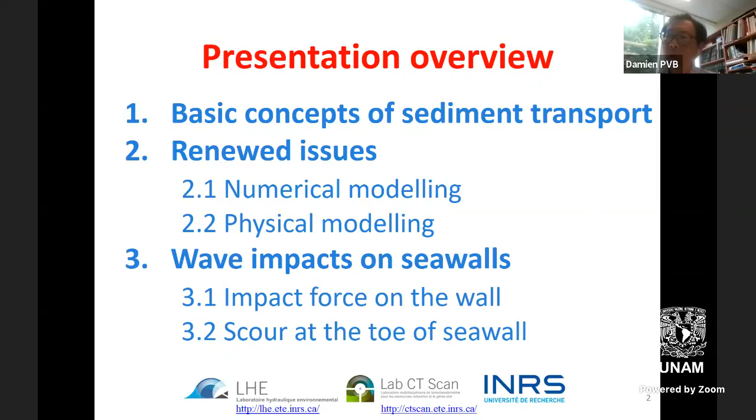So my presentation will propose three parts. One is some background on sediment transport: why is this important, what are the difficulties? Second, how numerical models can tackle difficulties, but what are the still remaining open questions? Also, the difficulty of making measurements and how inaccurate measurements sometimes are. And finally, I will illustrate with an ongoing study in my lab about wave impacts on seawalls in terms of impact forces, but also in terms of erosion at the toe of the structures.

So this first part is to give you some background: how important, how difficult the study of sediment transport is still nowadays, because it's a very old discipline. A long time ago, researchers were interested in sediment transport because it changed river morphology, it creates river meandering. It is also a problem for a lot of human activities like fishing, harbors, coastal engineering, coastal erosion, coastal flooding, and so on.

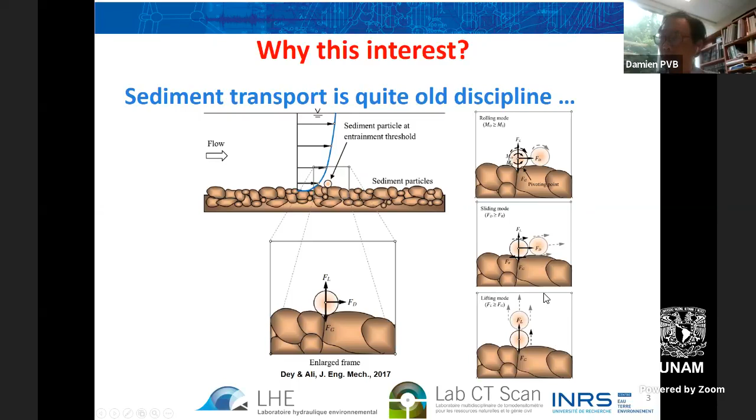Depending on the magnitude of the forces, we can have different motions of grains. For low velocity, but strong enough to move sediment, we can have rolling motion, so the grain rotates. For intermediate, we can have sliding, so the grain does not rotate and mostly slides. And when the fluid flow is very strong with high turbulence, the flow can pick up sediment directly vertically. So it is not clear that we can describe all of these modes of transport with unique parameters, but engineers consider unique parameters.

And nowadays, sometimes, because coastal protections are, in a sense, quite old, they suffer from coastal erosion themselves. So here, the danger can be high pollution, in particular if we break the oil pipeline. It can also be dramatic for communication if we have optical fiber collapse. And we can also have economic impact and societal impact when a coastline is eroded.

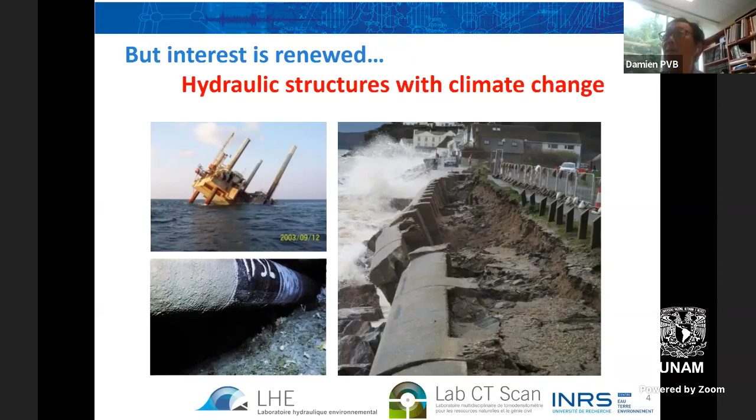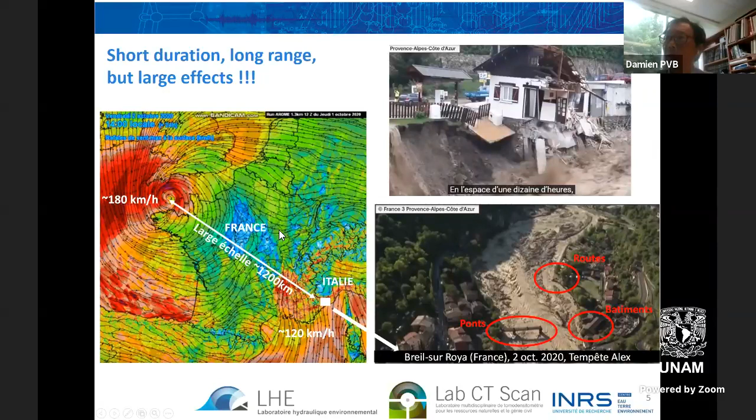Here you can see a bridge collapse. You can see roads damaged, and also buildings. And this damage only took place in a few hours. Of course, this phenomenon is related, in a sense, to climate change, and is prone to be more present in the coming years.

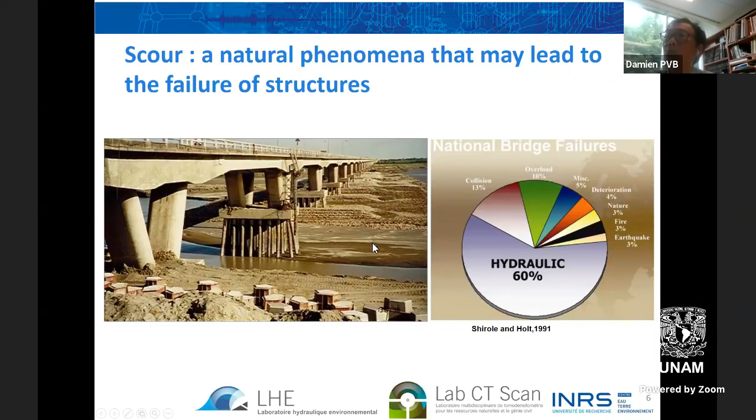So this typical picture is of interest for different types of constructions, monopile, multipile, also pipelines, as I explained before, but also coastal protection like seawalls or coastal dikes. In general, in natural environments, we can have many types of sediments, sand, clay, but also gravels. We can also have vegetation covering that sediment bed. And there is a huge variability in sediment in terms of density, organic content, minerals, and that material can have different states, saturated or not fully saturated.

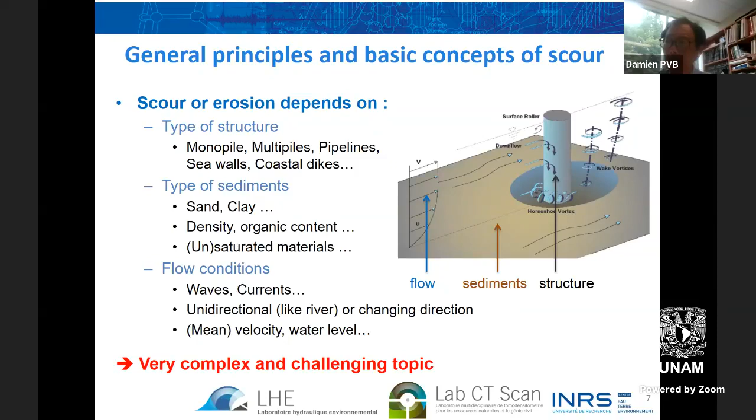Flow conditions are also very diverse in nature. That can be waves, current, and interaction between wave and current is very difficult. So the system has many parameters, and the physics is still very complex and challenging to describe in both mathematical and physical approaches.

I can also describe other similitudes for sediments or for water and air bubbles. Of course, there is field survey, which is very expensive, but which is important for applications. This part will not be detailed in this talk. Here in our lab in Canada, we have a very important facility to measure physical models at fine resolution.

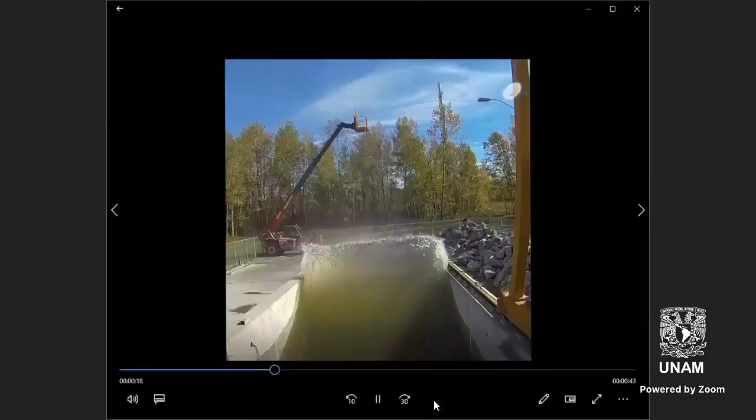Okay. Here. So, for instance, this is our large wave flume, which can generate realistic waves. And here is a demonstration of wave impacts on a vertical wall. Here the wave is around 2 meters high. The period is around 3-4 seconds. And in this study, we measure pressure at different points, and also the overtopping flow discharge to assess coastal flooding with high waves.

Okay, here I need to share this again. Can you? Yes. Can you, okay, sorry.

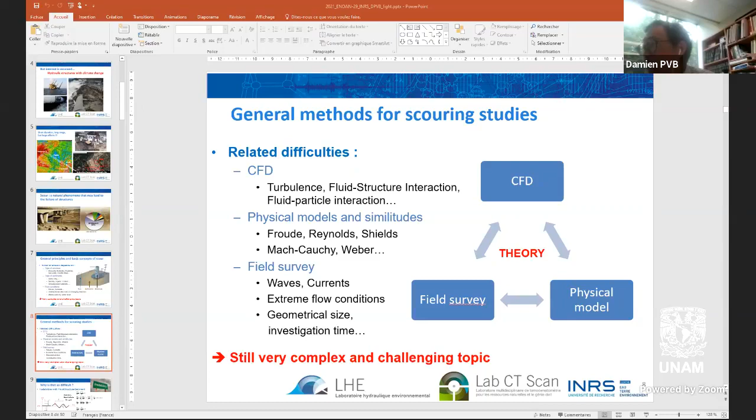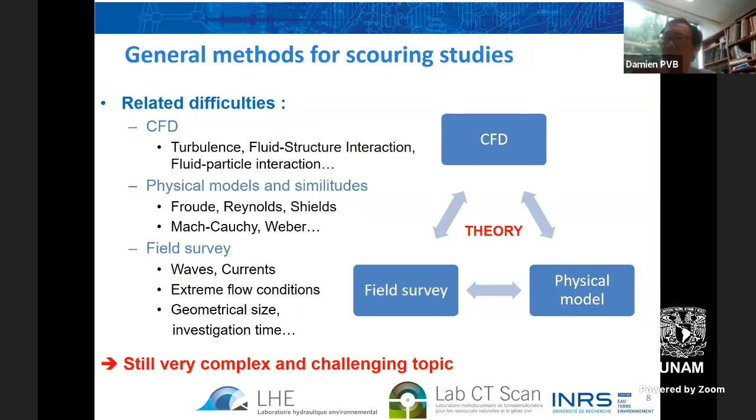Thank you. So just some slides, just 2 or 3 slides explaining in theory why the interface is a big question. With a fluid sediment, we can roughly assume that we have a fluid over a sediment bed, which can be considered as a high viscosity fluid, for instance. So the mechanism of erosion can be seen as a problem with a 2-layer fluid having an interface, and adding some kind of perturbation will create undulations.

So in fluid mechanics, we have very fundamental instabilities, which are called Rayleigh-Taylor and Kelvin-Helmholtz instability. So I will only describe this in 2 slides. This slide is to give you some notation when we have a high-speed fluid with density ρ1 that flows over another fluid having different density. So here is the mass conservation for potential flow. Here is the motion equation or Bernoulli equation, and this is the interface equation from the fluid 1 side. We have the similar equations for the fluid 2 side with mass conservation, motion equations, and interface.

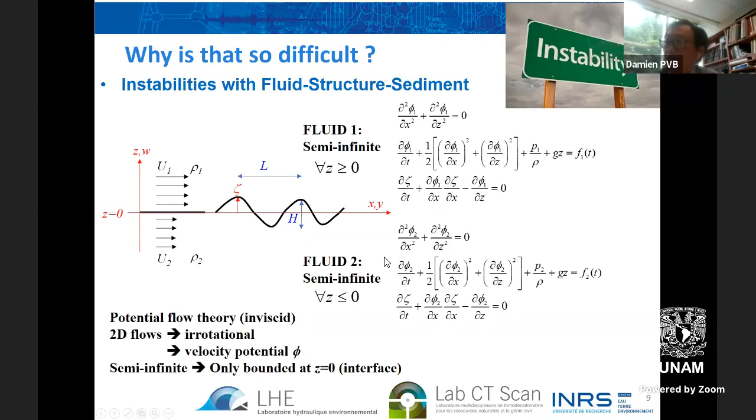Here to demonstrate physical instability, we consider a very simple theoretical case with potential flow, irrotational flow, and semi-infinite media. So linear stability analysis, a useful method for physicists but also for mathematicians, considers the stability around a base flow and analyzes a perturbation which has a waveform. So this is a waveform propagating along x with the phase velocity omega divided by k.

And here we make some analysis on the perturbation by linearizing the previous systems and obtaining this matrix relating the linearized equations in terms of perturbations, and we derive dispersion relations as a condition of nullity of the determinant of that matrix. And this is a classical dispersion relation for the previous system, having one fluid 1 over another fluid 2.

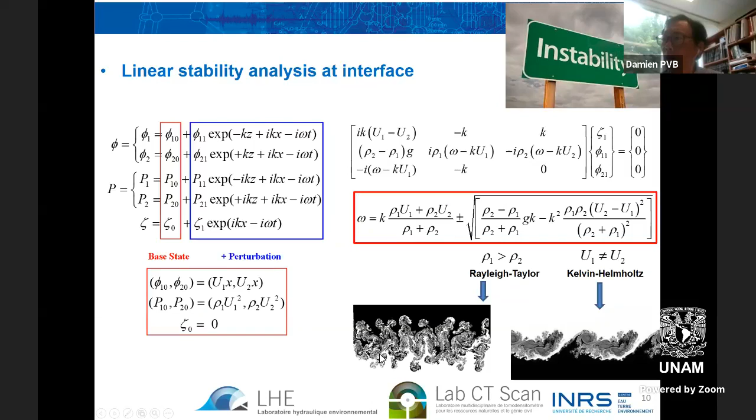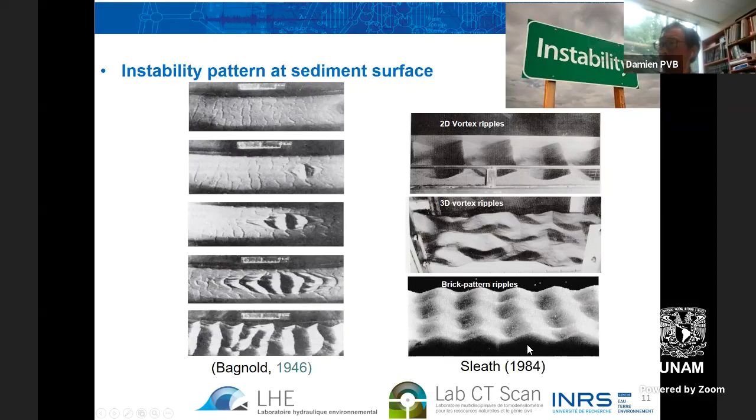Here are also other instabilities that we can observe with waves, starting from a flat bed. We can have undulations like Kelvin-Helmholtz, but with sediment. And here it is only 2D. And we can also generate 3D instability patterns, like 3D vortex ripples, and also this kind of more regular pattern shaped like a brick.

So this is to explain the context, the background of the fluid, sediment, and structures. So now, with this part, I would like to present the numerical approaches that are available to deal with that kind of system, and also physical approaches to model this kind of system in the lab. So here is the general principle of all numerical methods dealing with mobile beds undergoing erosion and deposition under flow, which can be current or waves.

So we usually start from the geometry of the system to compute the flow. From the flow, we derive the friction or the fluid-sediment interactions to compute the sediment transport. From sediment transport, we localize zones of deposition and zones of erosion that change the geometry, and we loop to the next step to change the hydrodynamics, which will change the sediment transport and also change the geometry and so on. This loop is very similar to instability.

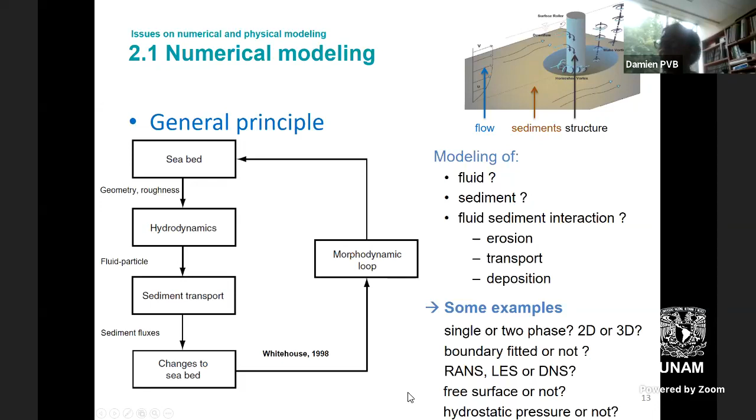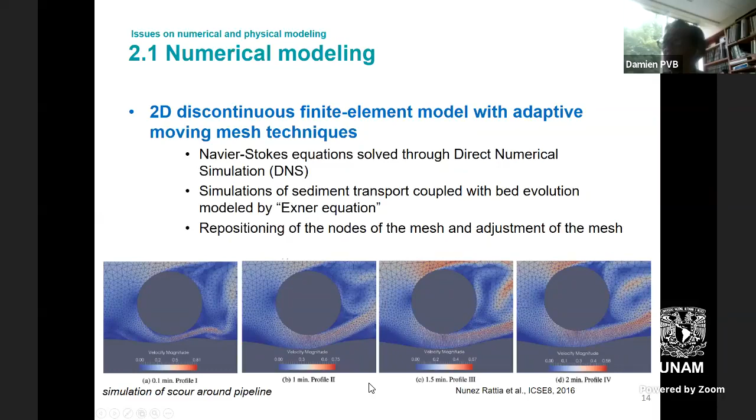So in this approach, we have not so bad results for a numerical model. I will explain to you later why I consider this result not so bad. Of course, for mathematical guys, I think people can see a very large difference, but I will explain that there is much uncertainty in physical parameters that makes that kind of result acceptable.

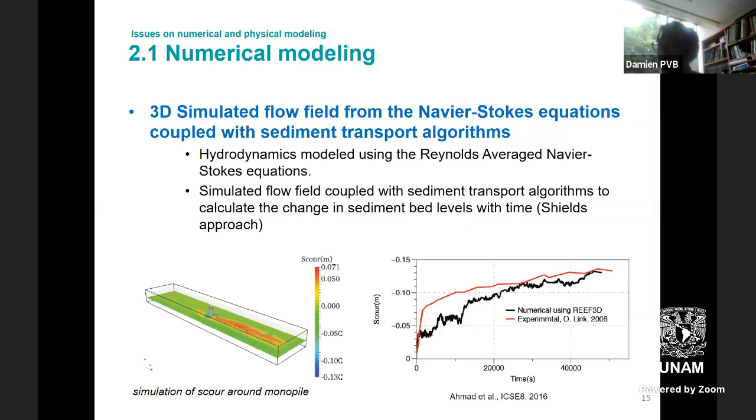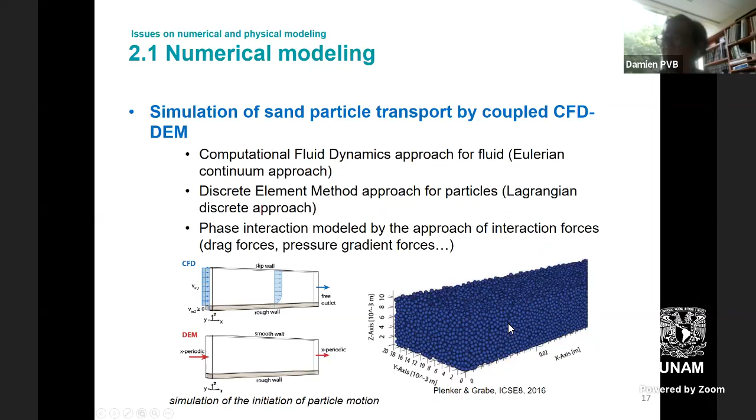So in my lab, we are using a two-fluid model, which computes both parts of the liquid. We have one layer of pure water or clear water, and one layer with sediment fluid like this. And we compute, in this case, jet impingement on the interface. And in the past we did shearing of fluid 1 over fluid 2 and obtained a nice Kelvin-Helmholtz shape.

We also applied this kind of model to scouring. Here we have a cylindrical pile subjected to river flow. Here is a description of streamlines with high vorticity in the wake region, and also some horseshoe vortex just upstream of the cylinder.

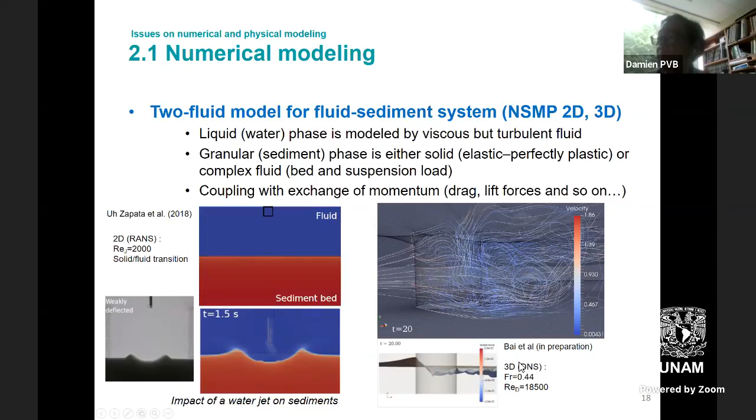So this is now a moment to talk about physical models. After describing the mathematical models that can be used to deal with fluid, structure and sediment problems, here are existing facilities. This example is an experimental facility in the UK, showing a study on coastal structures like dikes protecting harbours.

The same lab, showing a half cylinder subjected to waves to simulate an offshore wind farm. Here you can see the magnitude of scour erosion in the vicinity of the pile.

This example is my previous lab in France, showing design and conception of dikes, and design of armor blocks along dikes for sea defense in coastal regions. And here another famous lab in the Netherlands, showing multi-piles subjected to waves.

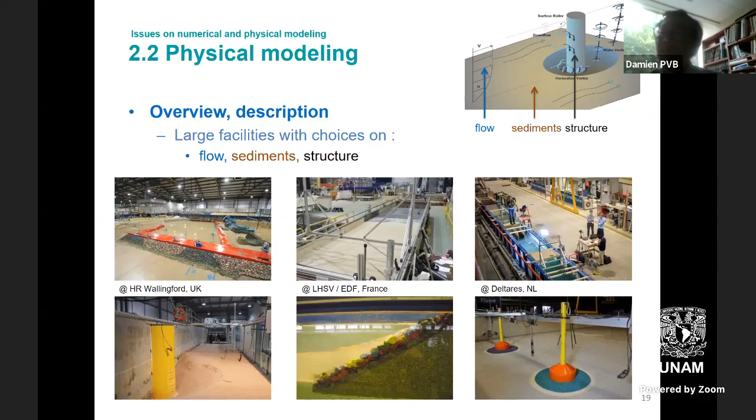So in all of these experiments, we need to fulfill requirements to upscale measurements to natural conditions, and this is done by strictly respecting scaling rules, which are mostly the Froude number. The Froude number is defined like this, as the ratio between velocity and critical velocity. There is a connection to the Mach number for compressible fluids like air.

And another important parameter to characterize the turbulence is the Reynolds number, which is the ratio between the velocity times the length scale, and the viscosity.

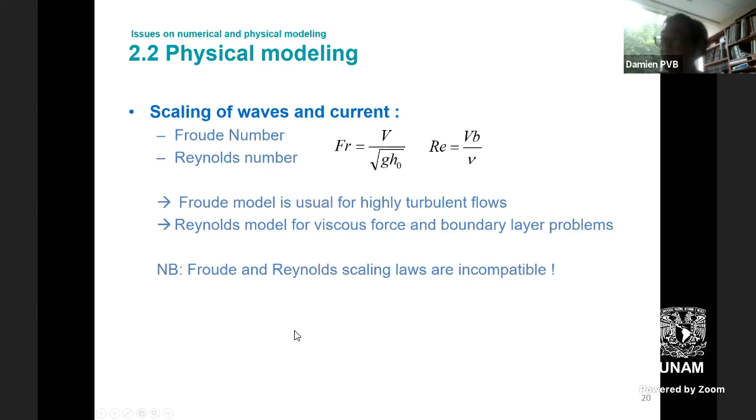One difficulty in coastal or hydraulic engineering is the compatibility between both similitudes. As we know, for water, Froude number and Reynolds number are impossible to fulfill together. So the only condition to respect both scalings is to change the liquid, which is not very easy for a large facility. The other is, of course, having a scale reduction equal to 1, which is also not convenient for laboratory conditions.

When dealing with structures, we also have to consider the interaction between waves and the structures. In particular, you can have diffraction, you can have a different pattern in the wake regime. So in this case, we need to fulfill another non-dimensional number, which is called Keulegan-Carpenter, showing mostly the transition between drag and inertia.

When dealing with waves and breaking waves, the aeration of the wave during breaking also plays an important role. As you may know, a small amount of air bubbles in water makes the water compressible. So a small amount of air bubbles can change the important property of incompressibility of the liquid of interest. Here is an example showing the bubble effect during wave impact. In particular, the momentum transfer of force to the air bubbles reduces wave impact on the wall.

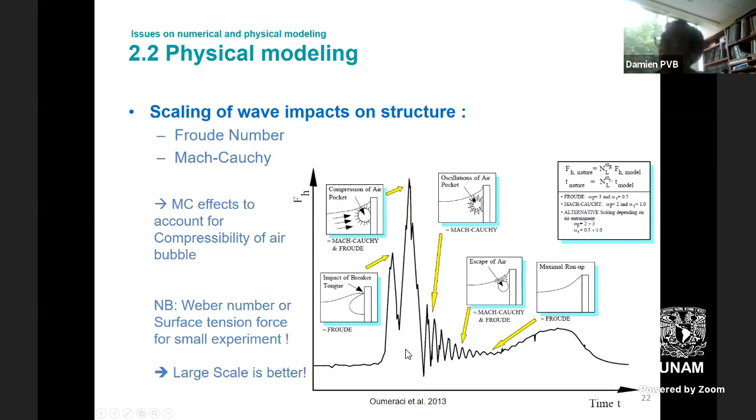Of course, if we deal with sediment, we need to consider scaling of sediment transport. This is done by considering the Shields number similitude, which expresses the entrainment force by water relative to the stabilizing force on sediment, which is mostly gravity. Here is a diagram showing the critical number for erosion. Above, we have erosion. Under, we have no erosion.

But recent studies present different curves depending on the mode of transport: rolling, sliding, or lifting. In particular, we can have slow motion below the classical critical curves during the rolling mode, and this is mostly one reason why the condition for incipient motion is not so accurate. Here, for instance, you can see that we can have 2-3 orders of magnitude between the theoretical critical value and the other criteria if we consider rolling.

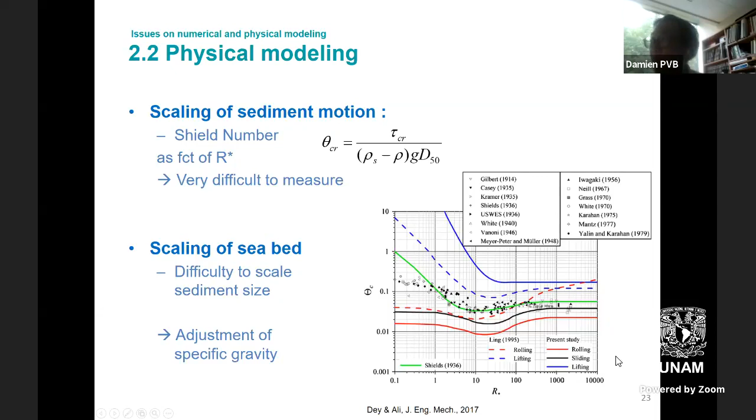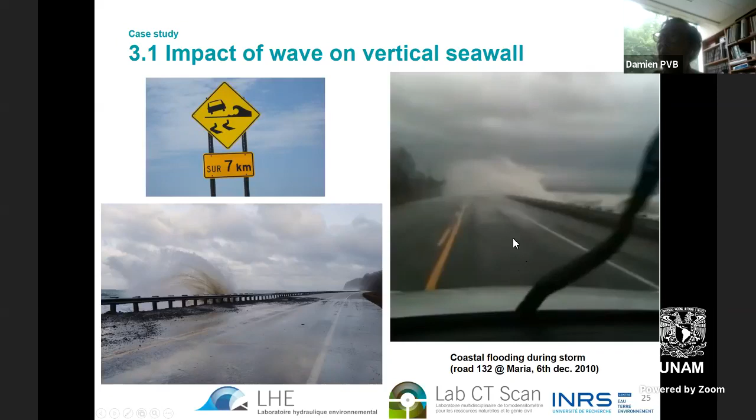And here are post-event photographs showing damage on the road. Coastal waves can also transport debris like wood or rocks, and this generates very costly repairs. And of course, with climate change and sea level rise, extreme scenarios increase. So the ministry is interested in protection for this kind of road.

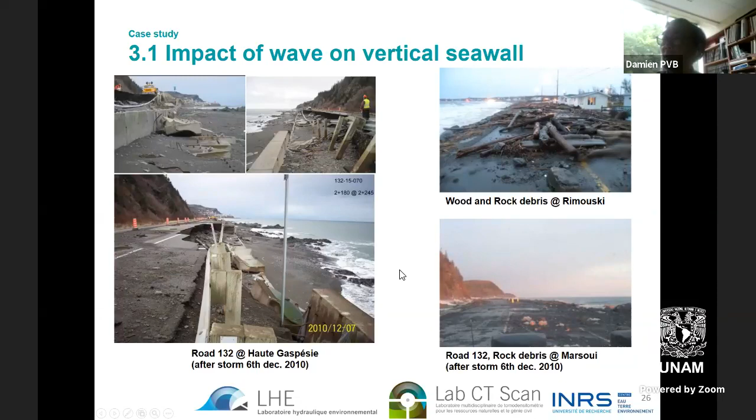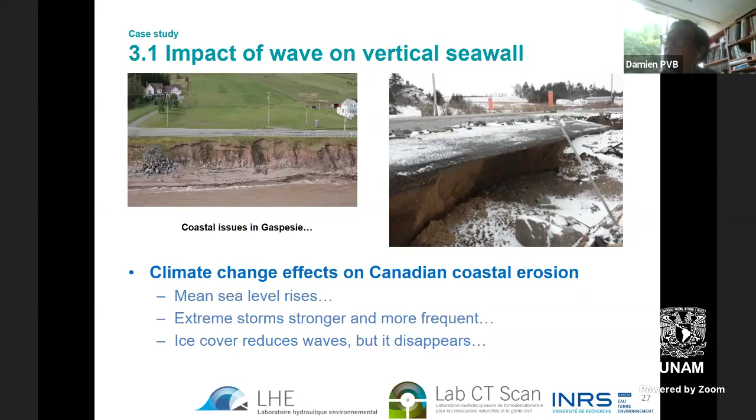Here are also other pictures showing erosion near infrastructures or structures. If you see this kind of landscape, you can clearly see erosion like this. In that case, usually erosion starts at the toe of the embankment of the structure, and by a regressive process damages the whole structure. This is why we conduct for the ministry different investigations on wave impacts on coastal structures like seawalls, but also on dikes. Today I will talk about seawalls.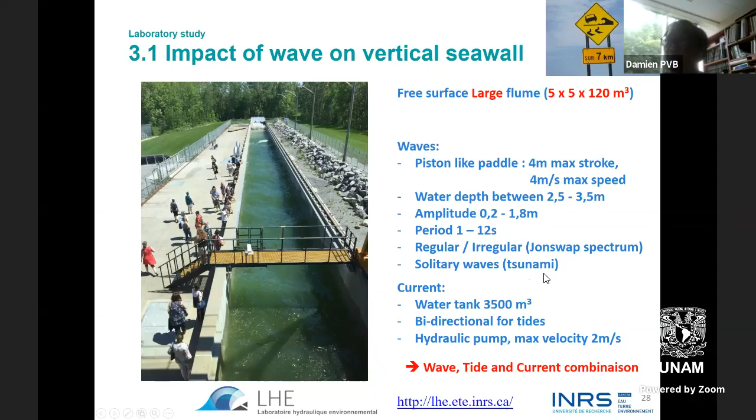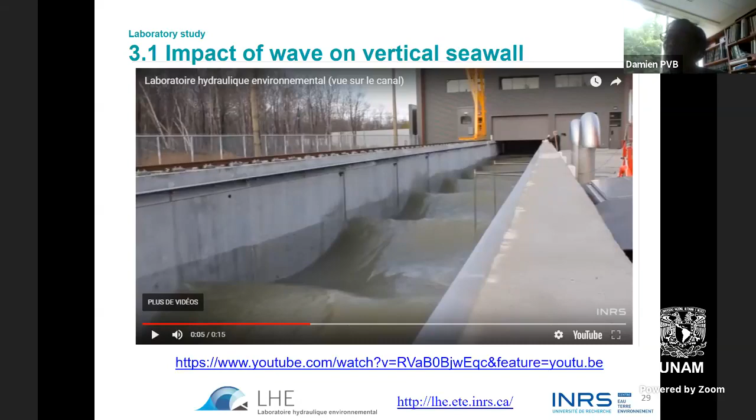We did experiments in our large flume, which is 120 meters long, 5 meters wide, and 5 meters deep. Here we use a piston-like paddle to generate waves up to 2 meters. The wave period can be up to 12 seconds. And we can also generate solitary waves like tsunamis. Okay, I show you the facility. Here the scale of the model was 1/2, so it's very close to natural scale.

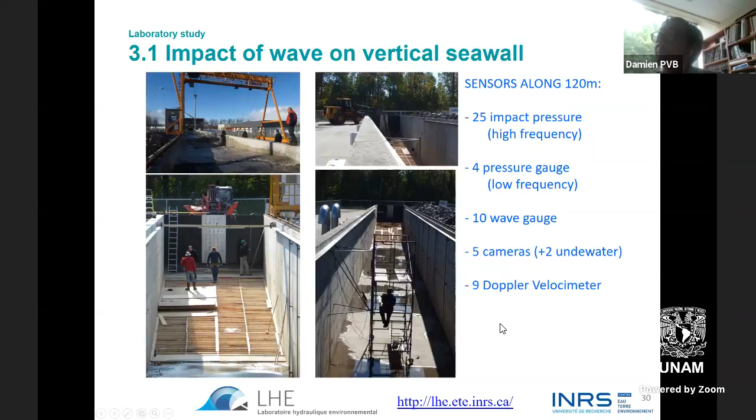For the construction, we had a big team to construct the wall with instrumentation of 25 pressure sensors to measure at very high frequency, 100 kilohertz, the impact pressure of waves on the wall. We also made velocity measurements and measured waves as well. Here are some pictures of the waves. It was not easy to measure aeration of the waves.

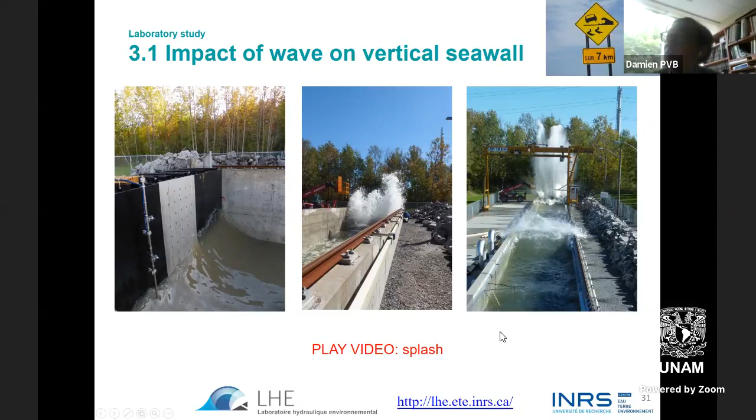And we also measured behind the wall the water overtopping the coastal structures. Here are typical examples of types of waves impacting the wall, with or without air bubbles. And we did analysis on pressure in relation to aeration of breaking waves.

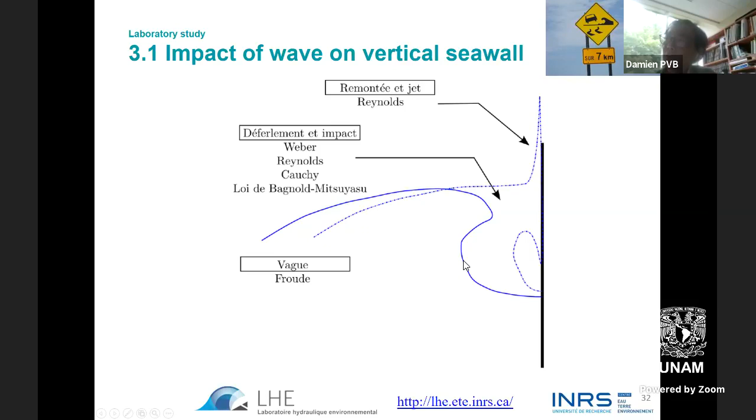So remember, if the flow doesn't have air bubbles, the liquid water is incompressible. But with a given amount of air bubbles, water is compressible. So that huge difference can explain why incompressible water has more pressure impact to the wall than aerated or compressible water with bubbles.

So this is important because if we want to reduce force on the coastal structure, it would be interesting to build a breaker in order to maximize the presence of bubbles in the wave before it impacts the wall.

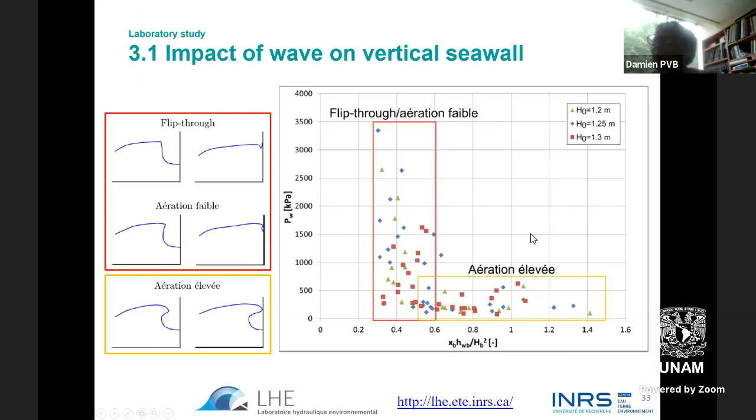So here is a diagram showing the experiment, the main results. So short peak duration with a very high pressure on the wall for non-aerated waves or incompressible flow, and long peak duration but low pressure on the wall for broken waves with bubbles.

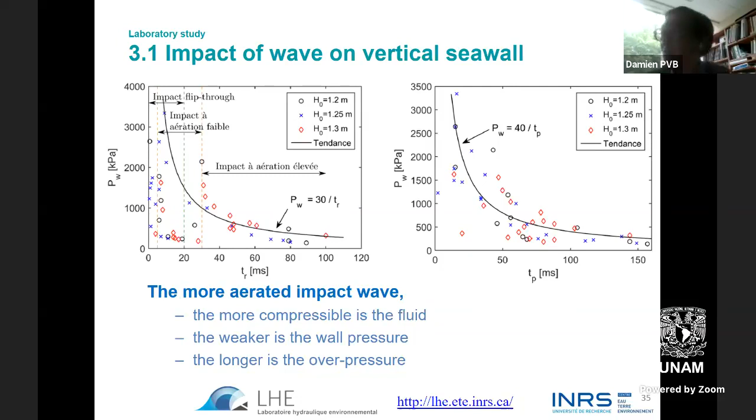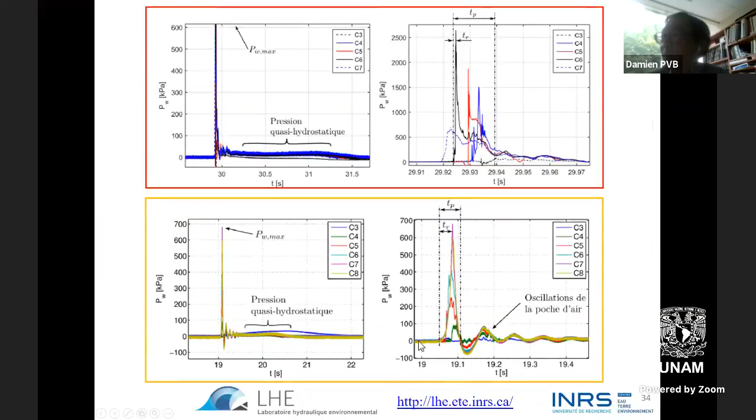Here is an explanation of the oscillation that we saw here in terms of interaction between bubbles and waves. So a large pocket of air can collapse and form smaller and smaller bubbles that create such kind of signal.

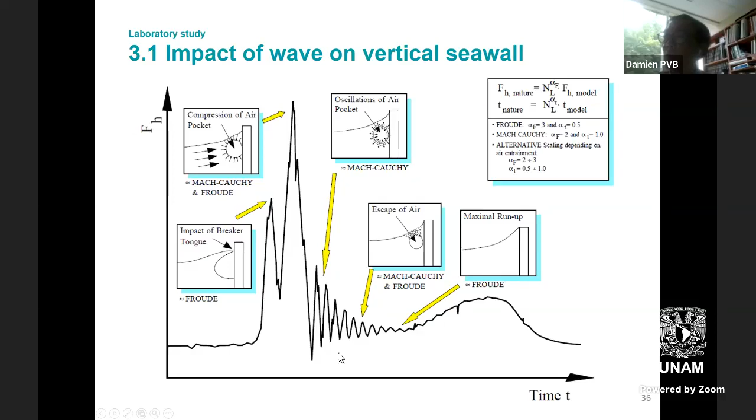During experiments on wave impact on a vertical seawall, we systematically observe scour at the toe of the vertical wall. And the ministry was particularly interested to better understand the mechanism and the depth magnitude here because of the stability of the coastal protection.

In particular, this image presents some basic mechanisms during wave impacts on a vertical seawall, showing the ascending jet forming a splash and an impinging jet to the bed, forming a scour hole here. Of course, if the scour depth is deeper than the foundation of the coastal protection, then we can have a risk of collapse of the protection itself. So this is why we focus our study on this kind of phenomena.

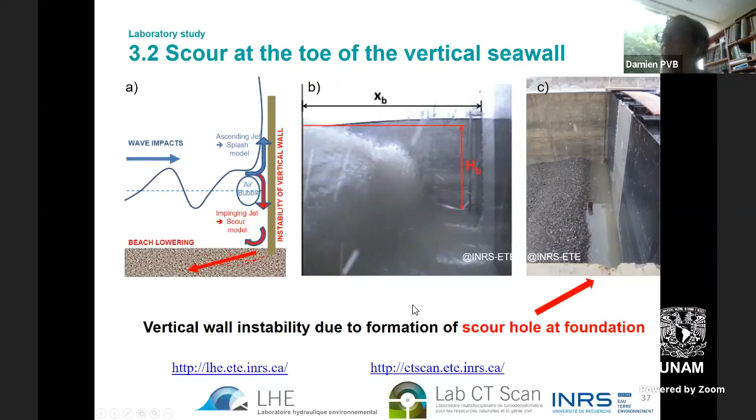Sorry. Yes. Sorry. You only have a couple more minutes. Okay. Just go to, yes.

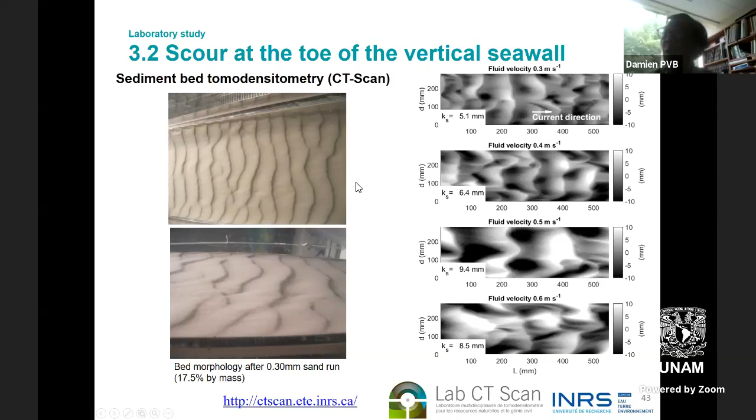An interesting part of sediment transport research in our lab is the measurement of bed forms or instability patterns at the liquid and sediment interface. And in particular, we measure the formation, migration and maturation of the waves of the interface in order to compute and validate numerical models like this.

So to conclude, I will recall that sediment transport is still a very open problem, with open questions. The main difficulties are the interaction between one phase, liquid, and another, sediment. This interaction, this complexity, is enhanced if you introduce structures. So in particular, my student Mario will give you some results on numerical models.

And there are three different approaches to deal with these problems. One is computational, which requires physical parameters. I explained that physical parameters are sometimes uncertain, and sometimes they present large errors, in particular for motion criteria, because it can depend on the mode of transportation: rolling, sliding, or lifting.

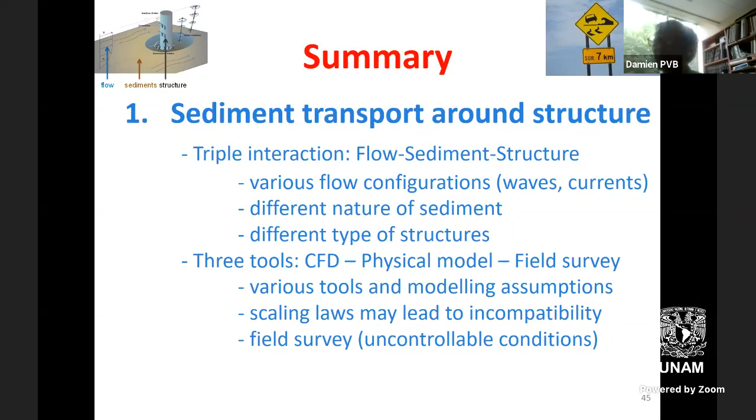And one difficulty in numerical models and also in physical experiments is the role of turbulence that gives perturbations at all frequencies that can destabilize the bed.

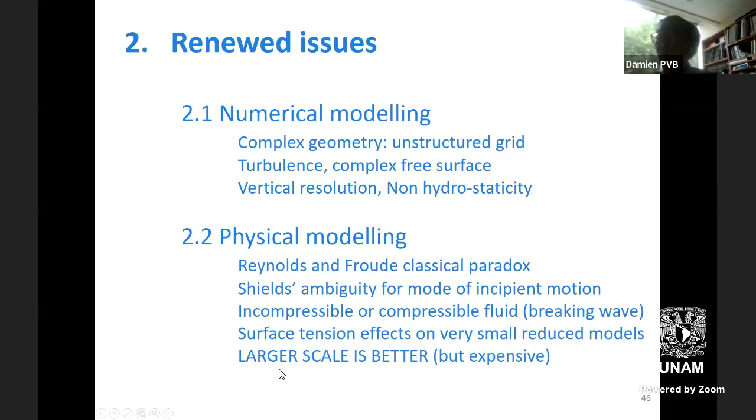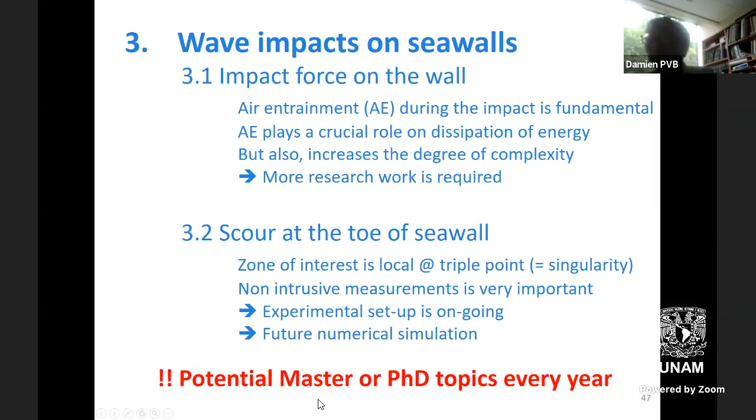And the ongoing research efforts we are doing in my lab are large-scale experiments with a large wave flume, and also numerical investigation on scour erosion. And every year I have some opportunities for students for master or PhD programs in my lab.

So thank you. Okay, well, thank you very much, Damien. We don't have more time for questions, but I would like to emphasize to the students who are listening right now that you have this financing program for master and PhD, and particularly I want to point out that this is direct financing for you, so you only need to send your CV to Damien, and if he approves it, you get this master or PhD program in his institution.